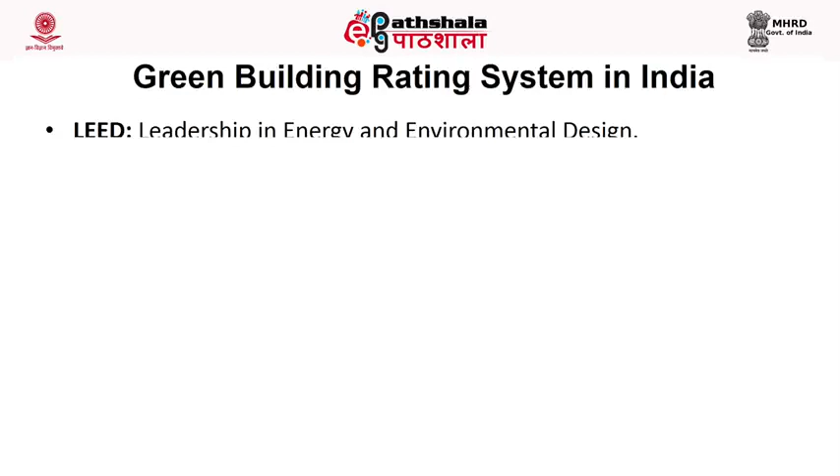Now let us discuss the green building rating systems in India. One system for rating of the building is LEED, that is Leadership in Energy and Environmental Design. Rating in this system is given as silver, gold or platinum, based on the credit that can be achieved or earned based on the following 7 parameters:

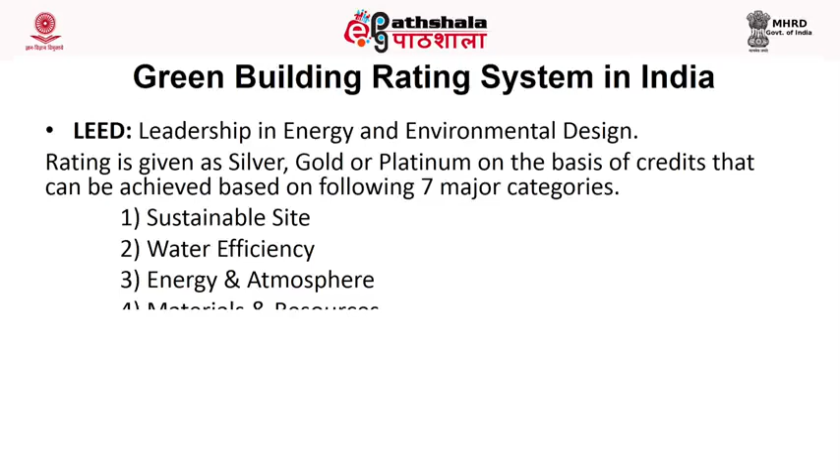sustainable site, water efficiency, energy and atmosphere, material and resources, indoor environment quality, innovation and design process, and regional priority.

The other rating system for buildings is Indian Green Building Council. The rating system or criteria upon which the building is rated is similar to that of LEED.

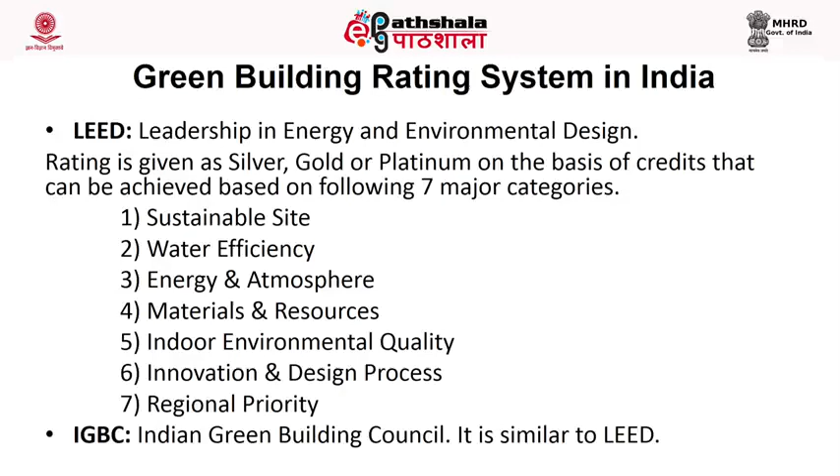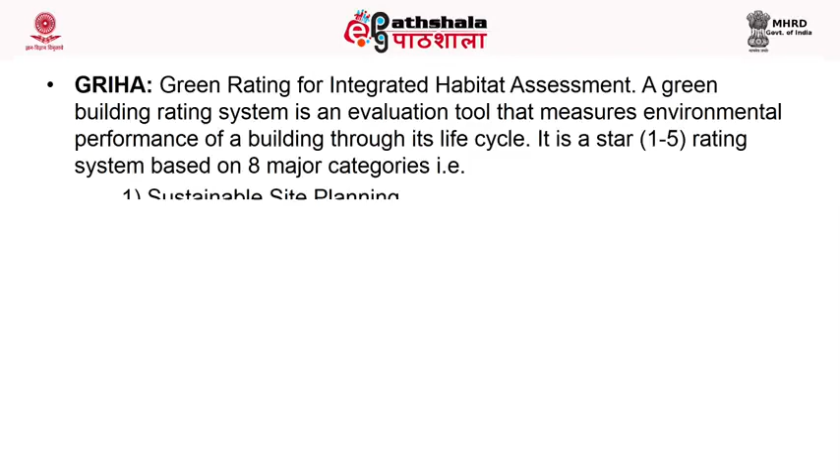Now the third system is GRIHA, which is more popular as compared to the previous two. GRIHA is Green Rating for Integrated Habitat Assessment, a green building evaluation tool that measures environmental performance of a building through its life cycle.

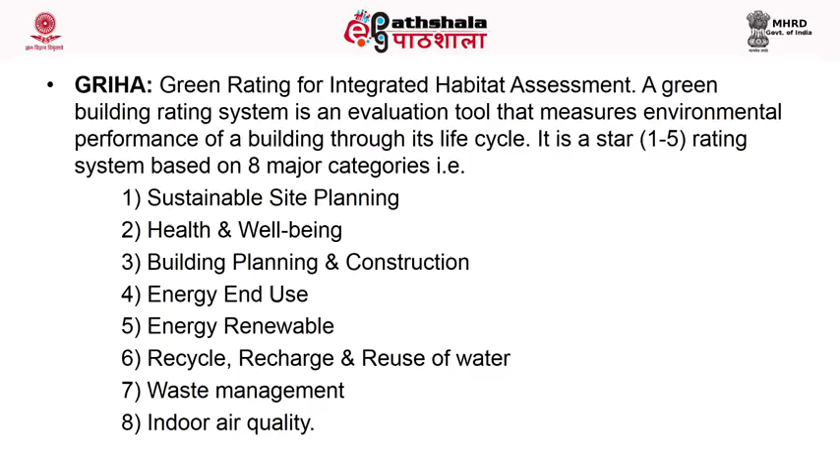The rating under GRIHA is awarded on a 1 to 5 rating system, and the different parameters on which points are earned decide the rating of the building. The 8 points are sustainable site planning, health and well-being, building planning and construction, energy use, renewable energy use, recycle, recharge and reuse of water, waste management, and indoor air quality.

GRIHA is India's national rating system, developed by the Energy and Resources Institute, and endorsed by the Ministry of New and Renewable Energy, Government of India. It is based on nationally accepted energy and environmental principles and seeks to strike a balance between established practices and emerging concepts, both at national and international level.

GRIHA attempts to minimize a building's resource consumption, waste generation, and overall ecological and environmental impact by comparing them to certain nationally acceptable limits or benchmarks.

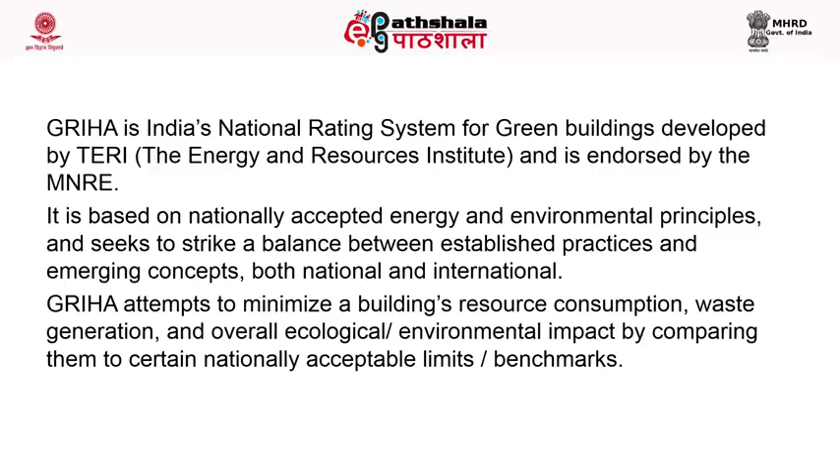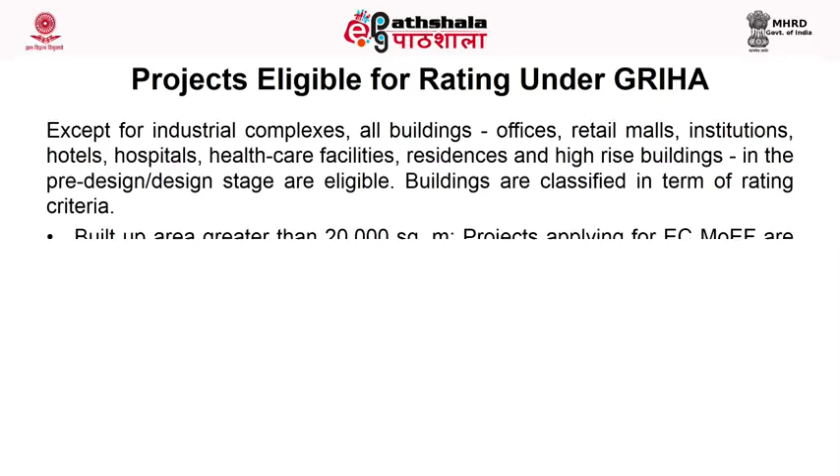Now, the different projects eligible for GRIHA rating are classified as follows: except industrial complexes, all buildings - offices, retail malls, institutions, hotels, hospitals, healthcare facilities, residences, and high-rise buildings - are eligible for rating under GRIHA.

The buildings rated under GRIHA are classified into categories. Category 1 is built-up area greater than 20,000 square meters. In this category, projects applying for environmental clearance to MOEF are eligible to apply. It is mandatory to register the project under GRIHA rating after the pre-certification has been awarded.

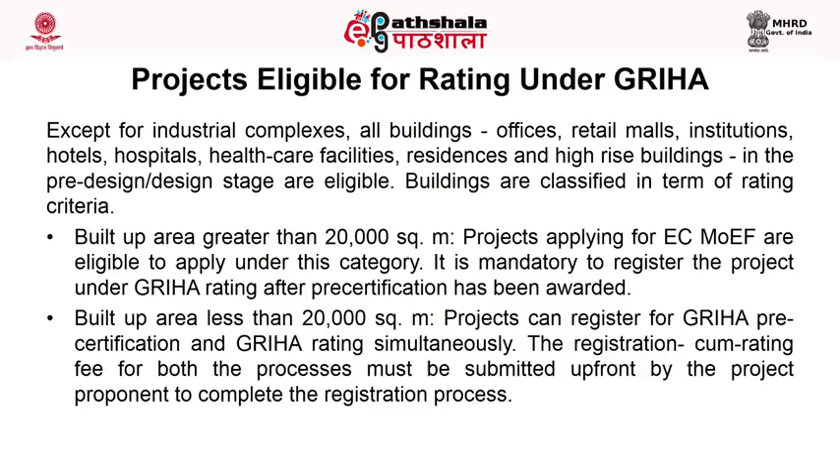The second category is where the built-up area of the building is less than 20,000 square meters. The project can register for GRIHA pre-certification and GRIHA rating simultaneously. The registration cum rating fee for both processes must be submitted upfront by the project proponent to complete the registration process.

Now let us discuss the registration process. Registration should be completed at the onset of the project cycle, as there are several important issues that need to be addressed at this stage only. On submitting the online expression of interest, the project team submits a proposed development plan with a recent date-stamped site photograph. Association for Development and Research of Sustainable Habitats, that is ADaRSH, shall then review the feasibility of registering the project for GRIHA pre-certification. Once approved by ADaRSH, the project can proceed with payment of registration cum rating fees and the pre-certification process.

The structure of the pre-registration fees: for buildings having area less than 5,000 square meters, that is rupees 3,14,000. If the area is more than 5,000 square meters, for every additional square meter, rupees 3 and 75 paisa, apart from the rupees 3,14,000. That is the registration fee.

In the post-documentation stage, all necessary proof through documents for the points targeted is submitted and then evaluated by third-party regional evaluators to determine the final rating to be awarded to the project.

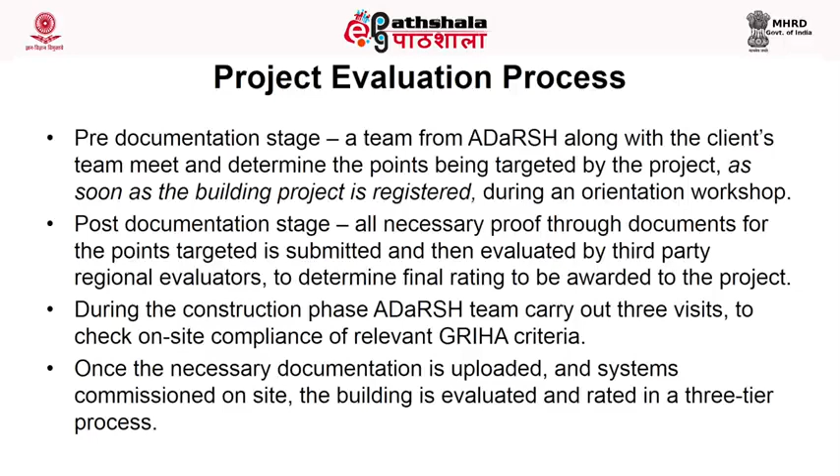During the construction phase, the ADaRSH team carries out 3 visits to check the on-site compliance of relevant GRIHA criteria. Once the necessary documentation is uploaded and the system commissioned on site, the building is evaluated and rated in a 3-tier process. The preliminary evaluation is done by experts from ADaRSH.

The project is rejected if mandatory criteria are not complied with at this stage only. The team then evaluates the optional criteria and estimates the total number of achievable points.

The next stage is that all compliance documents are vetted through the appraisal process as outlined by GRIHA. After this, the evaluation report is given to members of an evaluation committee comprising external experts.

The members independently review and award points.

It is believed that sustainability is always local, and thus also that the people of a specific region of our country know their local requirements best.

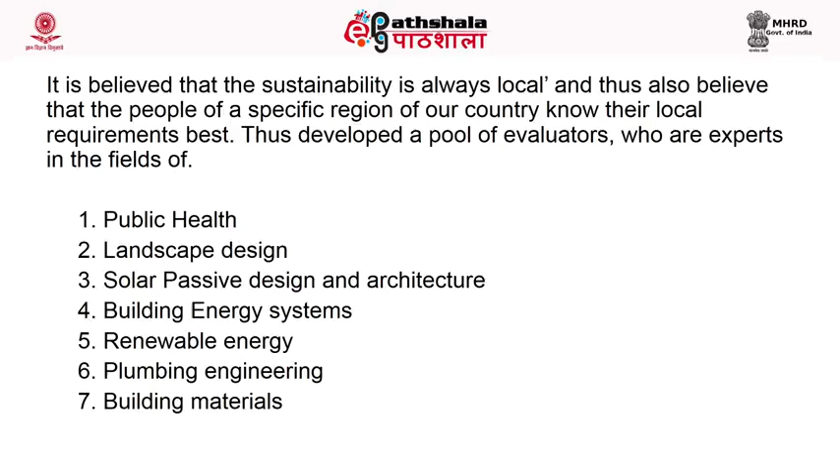That is why a pool of evaluators is developed by GRIHA, who are experts in different fields such as public health, landscape design, solar passive design and architecture, building energy systems, renewable energy systems, plumbing engineering, building materials, etc. This pool of experts from these areas conducts the evaluation for the building in their respective areas.

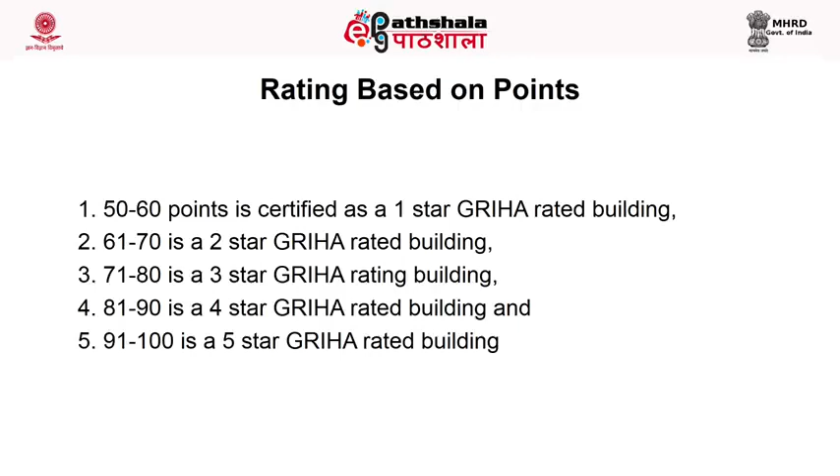The basis for rating based upon points scored by each building is as follows: below 50 points, there is no rating. From 50 to 60 points, the building is rated as 1 star GRIHA rated building. 61 to 70 points, it is 2 star. 71 to 80, it is 3 star. 81 to 90, it is 4 star. And 91 to 100, it is 5 star GRIHA rated building.

Now, the different criteria points: the first heading is site selection and site planning, worth 8 points. In all there are 34 points under 8 headings.

The main objective of this criteria point is to maximize the conservation and utilization of resources, that is land, water, natural habitat, fauna and energy conservation, and enhance system efficiency.

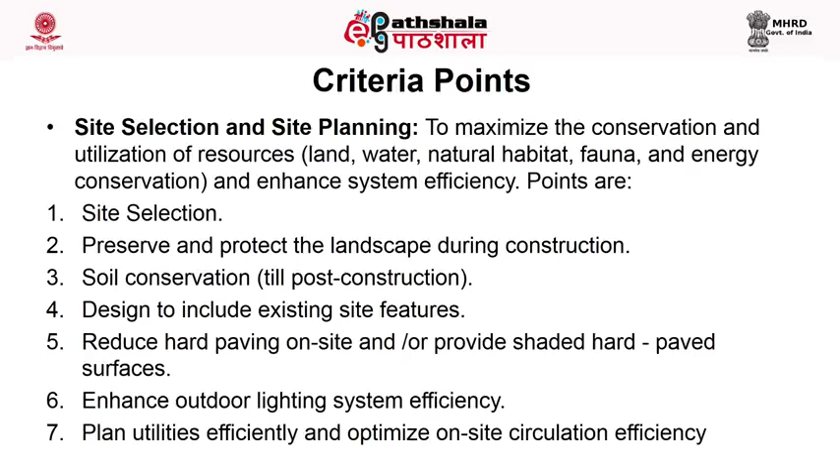The different points under this criteria are: site selection; preserve and protect the landscape during construction; soil conservation; design to include existing site features; reduce hard paving on site, or provide shaded hard paved surfaces; enhance outdoor lighting system efficiency; plan utilities efficiently; optimize on-site circulation efficiency; provide the minimum level of sanitation and safety facilities for construction workers; and reduce air pollution during construction. These are the 9 sub-points under site selection and site planning.

The next main heading is the building planning and construction stage. The objective of this criteria is to maximize resource conservation - water, energy and materials - and enhance efficiency of the system and operations.

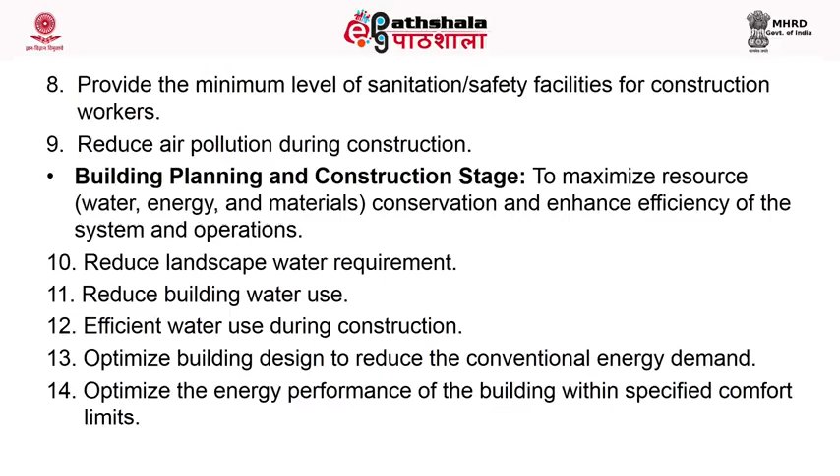Under this main heading, the different points are: reduce landscape water requirement, reduce building water use, efficient water use during construction, optimize building design to reduce conventional energy demand, and optimize the energy performance of the building without sacrificing the specified comfort limits.

Utilization of fly ash in the building structure. I may add here that fly ash is a product of the coal-based thermal power plant, and now the technology is available for the use of fly ash for construction or for manufacturing of bricks, and its use as one of the intermediates in the cement industry.

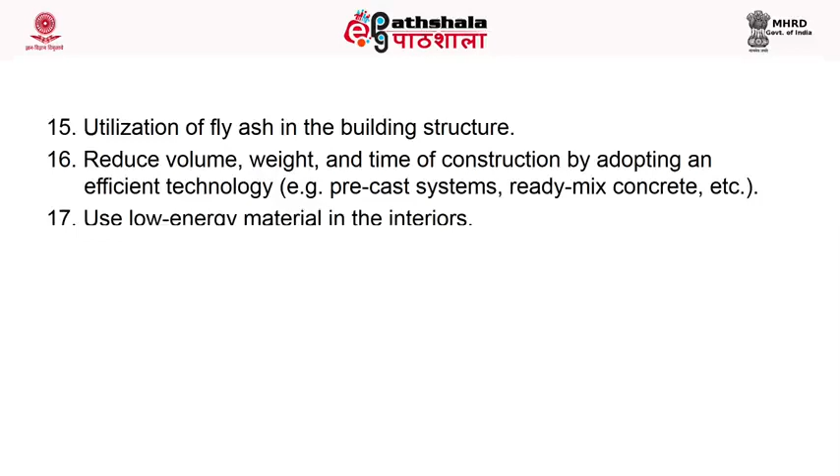The next point is to reduce volume, weight, and time of construction by adopting efficient technology - for example, the precast system, ready mix concrete, etc.

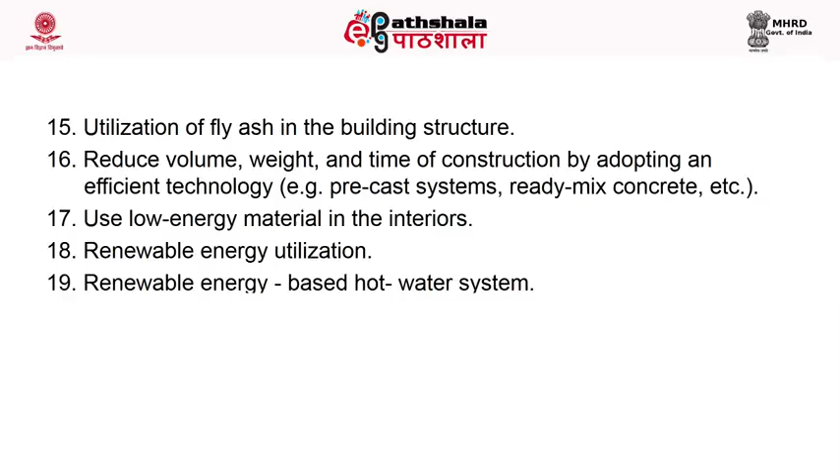Use of low energy material in the interior - it means that material used should be selected in such a way that the energy consumption in their manufacturing is minimum.

The next point is renewable energy utilization - that is, use of solar, wind, biomass based renewable energy systems depending upon the situation. Now, the renewable energy based hot water system: the solar water heater is one very important example, which can be utilized to supply hot water.

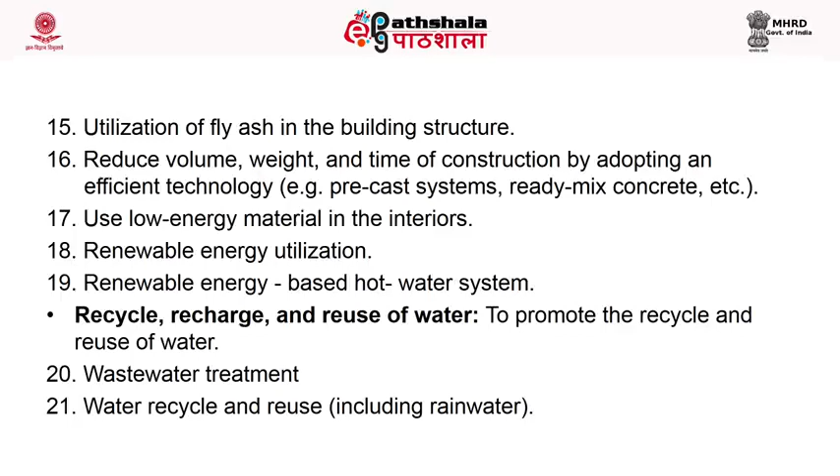The next main heading is recycle, recharge and reuse of water. The main objective of this criteria is to promote the recycle and reuse of water. Under this main criteria, the different points are wastewater treatment, and water recycle and reuse, including rainwater.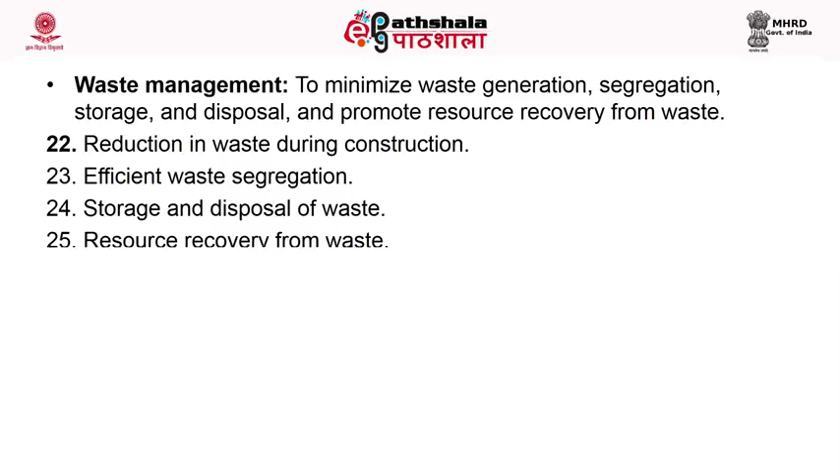The next main point is waste management, and the objective of this category is to minimize waste generation, segregation, storage, and disposal, and to promote resource recovery from waste. Under this criteria, the 4 points are: reduction in waste during construction, efficient waste segregation, storage and disposal of waste, and resource recovery from waste.

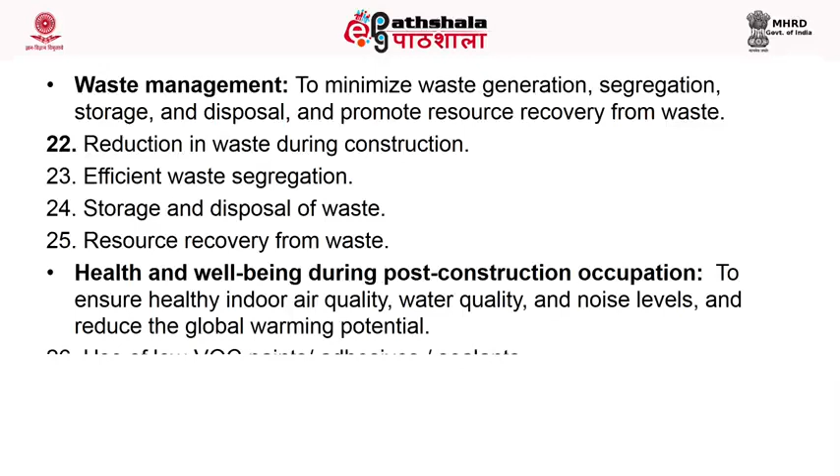The next main criteria is health and well-being during post-construction occupation. The objective of this criteria is to ensure healthy indoor air quality, water quality, and noise level, and to reduce the global warming potential.

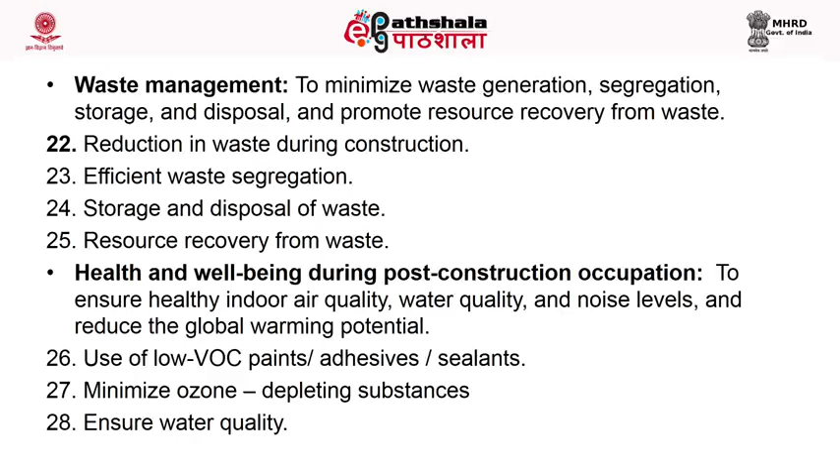The different points under this criteria are: use of low volatile organic compound paints, adhesives, and sealants; minimize ozone depleting substances; ensure water quality; acceptable outdoor and indoor noise levels; tobacco and smoke control; and provide the minimum level of accessibility for persons with disabilities.

The next main criteria is building operation and maintenance. The objective of this criteria is to validate and maintain green performance level, and adopt and propagate green practices and concepts.

The 2 points under this criteria are energy audit and validation, and building operation and maintenance. We have discussed in detail regarding the energy audit in one of the previous modules.

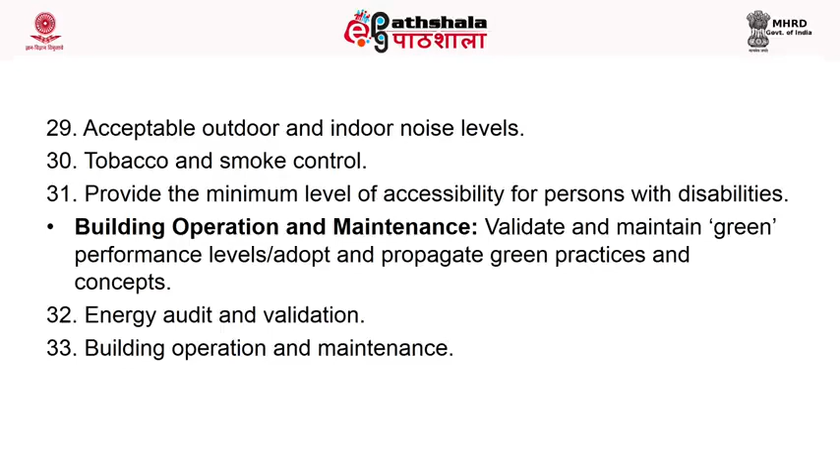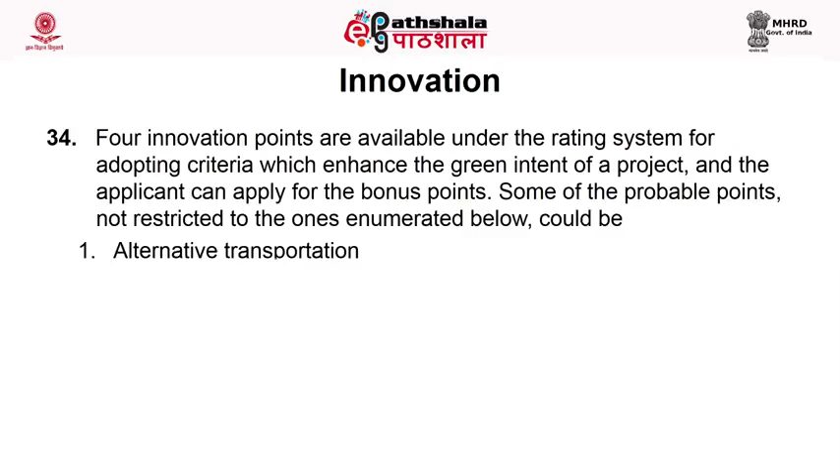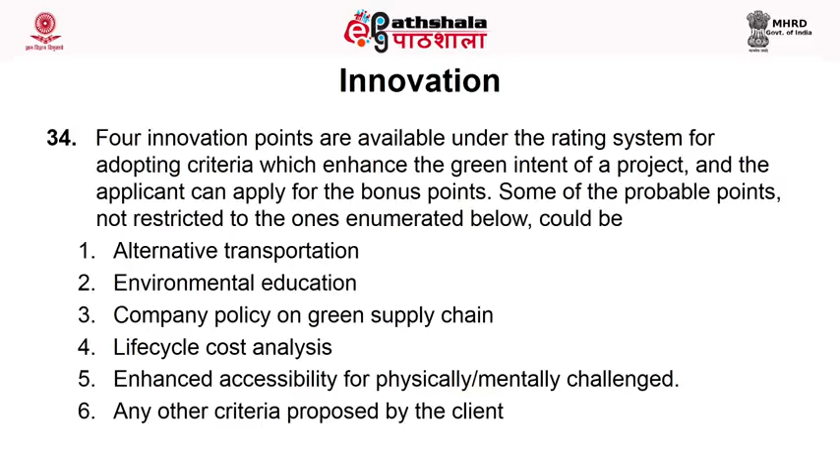The last main criteria is innovation. 4 innovation points are available under the rating system for adopting criteria which enhance the green intent of a project, and the applicant can apply for bonus points. Some of the probable points, not restricted to the ones enumerated, could be: alternative transportation, environmental education, company policy on green supply chain, life cycle cost analysis, enhanced accessibility for physically and mentally challenged, and any other criteria proposed by the client.

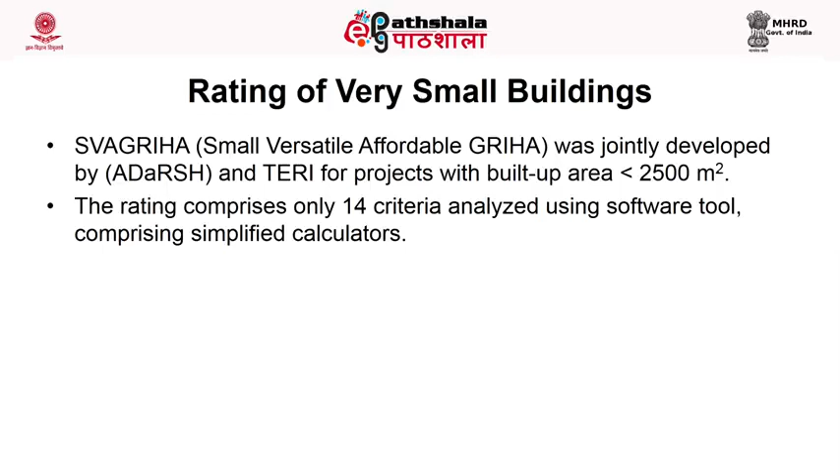Now this is all about the rating system through GRIHA for the green buildings. Let us also discuss very briefly the rating system for very small buildings. For rating of very small buildings, the small versatile affordable GRIHA, this was jointly developed by ADaRSH and The Energy and Resources Institute for projects with built-up area less than 2500 square meters.

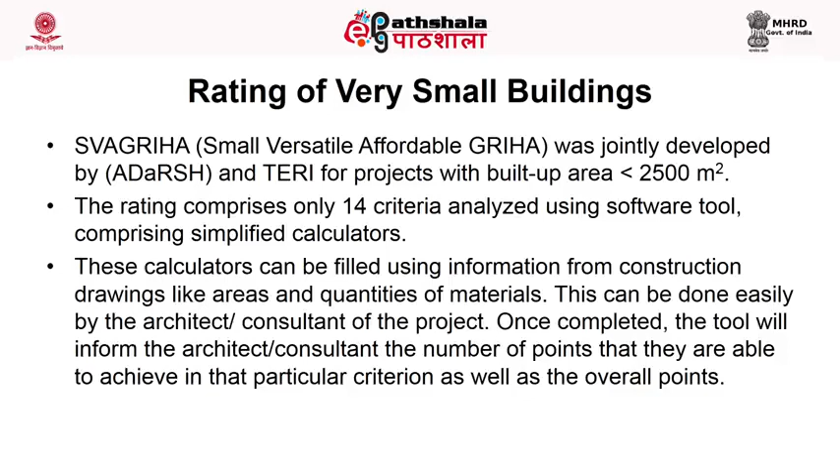The rating under this scheme comprises only 14 criteria, analyzed using software tools comprising simplified calculators. These calculators can be filled using information from construction drawings like area and quantities of material. This can be done easily by the architect or consultant of the project. Once completed, the tool will inform the architect or consultant the number of points they are able to achieve in that particular criteria, as well as the overall points.

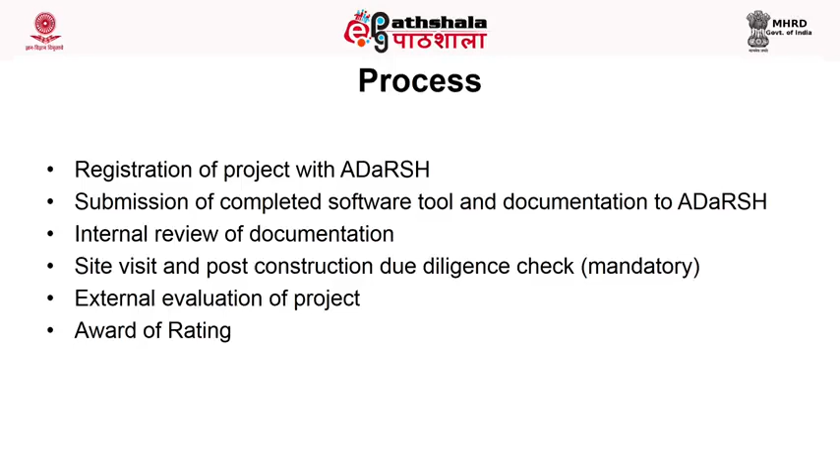The process for registration and evaluation of small buildings includes registration of the project with Adarsh, submission of completed software tool and documentation to Adarsh, internal review of documentation, site visit and post-construction due diligence check (it is mandatory), external evaluation of project, and the award of rating.

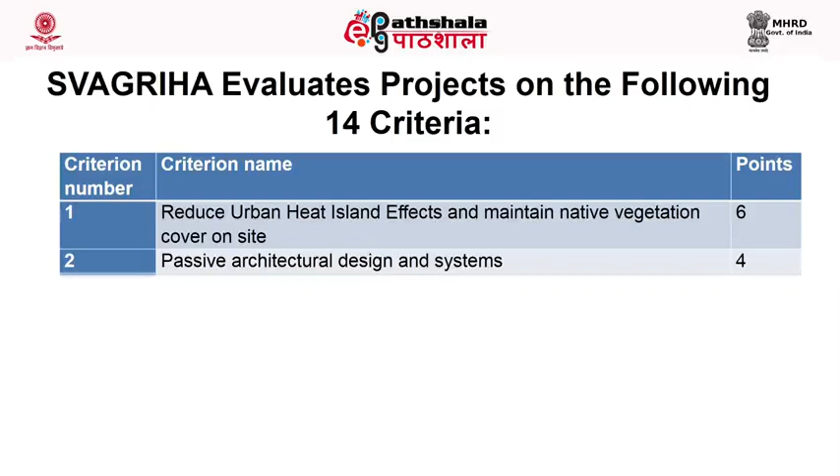Now the different 14 points required for evaluation of the building are: reduce urban heat island effect and maintain native vegetation cover on site, which contains 6 points. Then passive architectural design system, good fenestration design for reducing direct heat gain and glare while maximizing daylight penetration. The fourth point is efficient artificial lighting system.

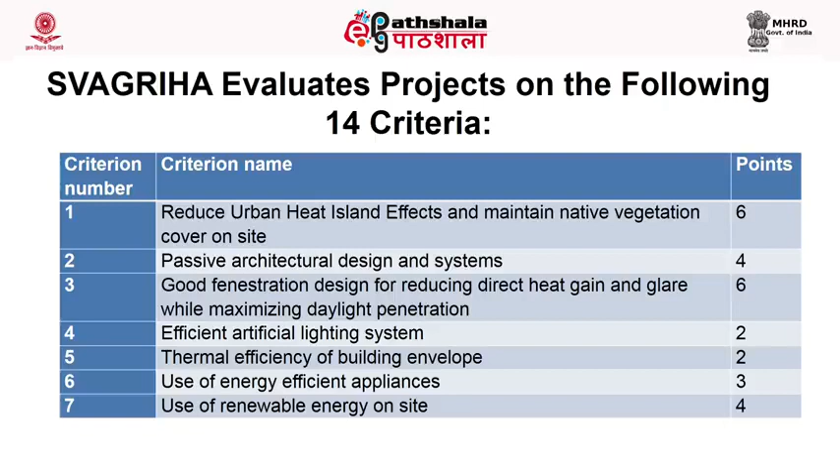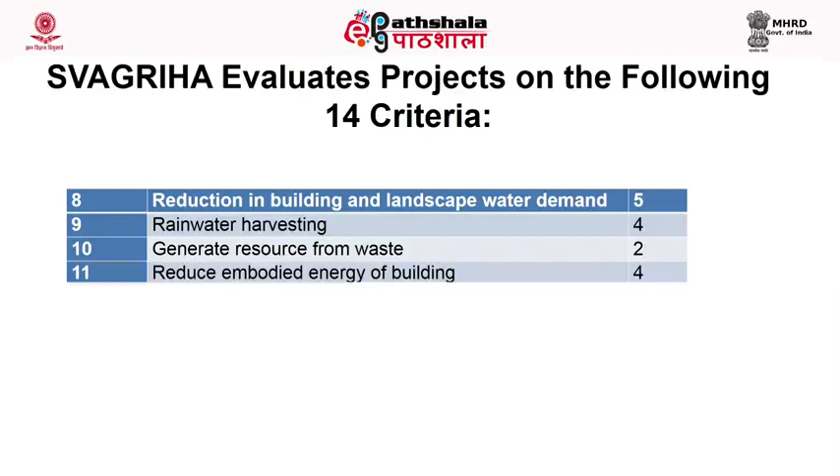Next is thermal efficiency of building envelope, use of energy efficient appliances, use of renewable energy on site, reduction in building and landscape water demand, rainwater harvesting, generate resources from waste, reduce embodied energy of building, use of low energy material in interiors, adoption of green lifestyle, and innovation.

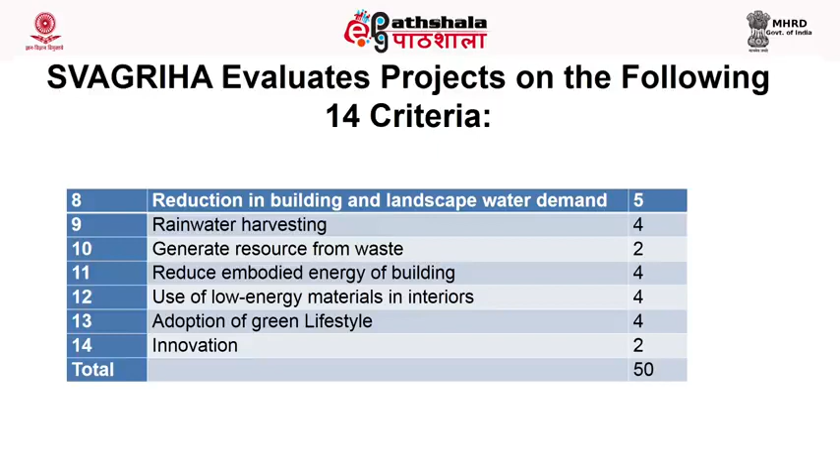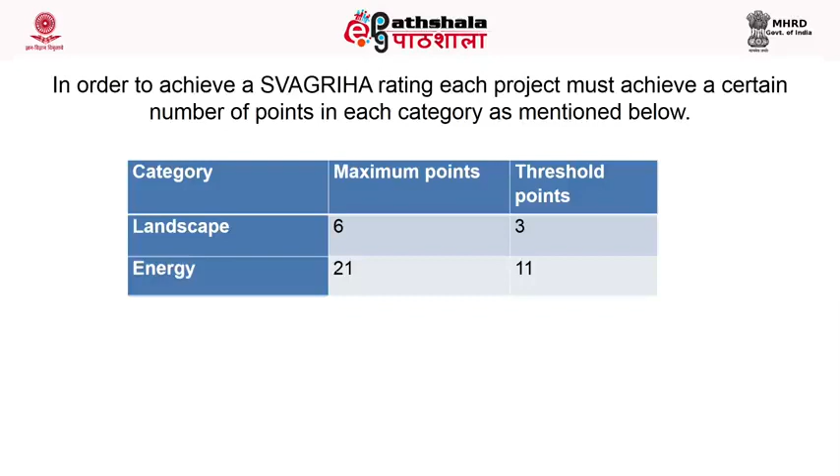So that way it has a total of 50 points, and during the evaluation, for each major category like landscape, energy, water, materials, and others, there are some threshold points, meaning that minimum those points should be earned to make the project eligible for its rating. The table gives the threshold point and maximum point in each of the 5 major categories, that is landscape.

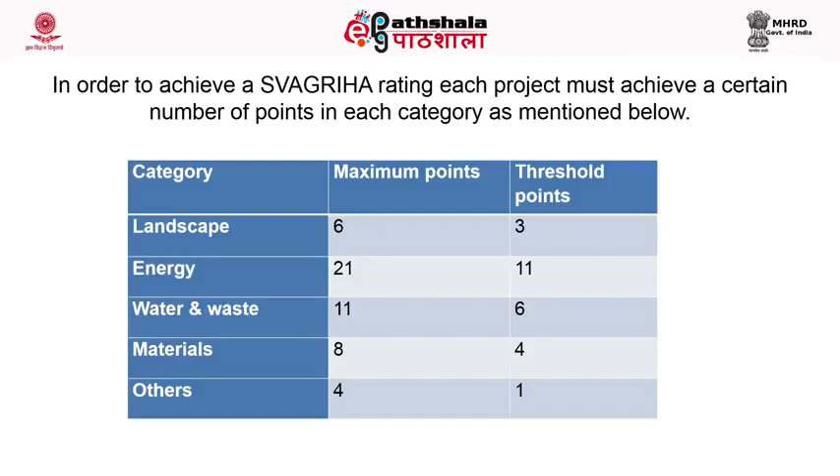The threshold point is 3, where the maximum points are 6. In energy, the total points are 21 and threshold point is 11. Water and waste, the total points are 11 and threshold value is 6. For materials, the total points are 8, whereas the threshold limit is 4. And others, 4 and 1.

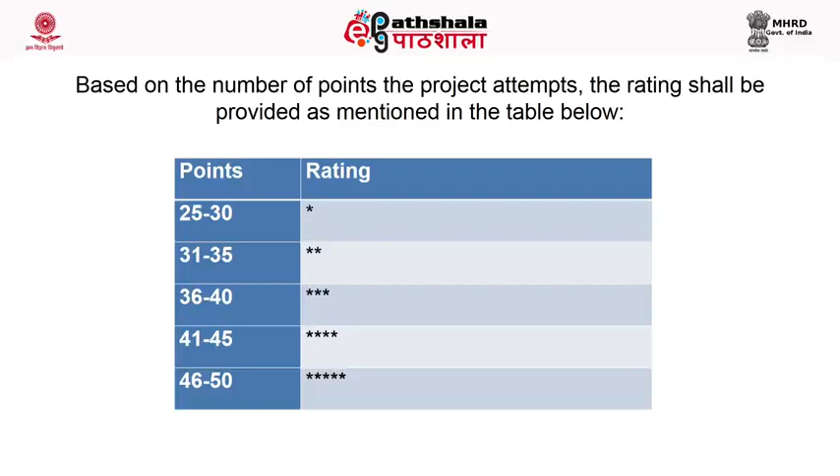Now, based on the number of points the project attains, the rating shall be provided from 1 to 5 star. The relation between the points and the rating is: 25 to 30 points earned is rating 1 star building. Points earned from 31 to 35 is 2 star, 36 to 40 is 3 star, 41 to 45 is 4 star, and 46 to 50 is 5 star.

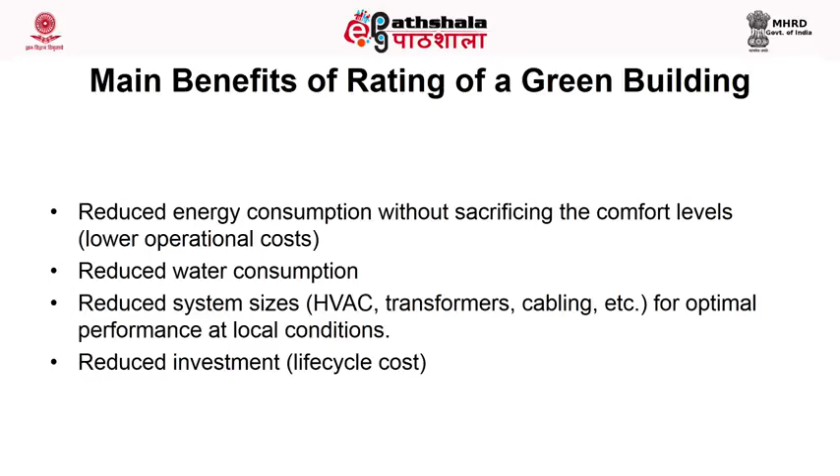Now the next question is what are the main benefits, why we should go for green building rating. The important points are: reduced energy consumption without sacrificing comfort level, reduced water consumption, reduced system size - transformer, cabling, etc. - for optimal performance at local conditions, reduced investment, reduced destruction of natural areas, habitat, biodiversity, reduced soil loss from erosion, etc. Reduced air and water pollution with direct health benefits, limited waste generation due to recycle and reuse, reduced pollution loads, increased user productivity, and enhanced image and marketability.

Now, apart from these, there are certain incentives given by the Government of India at the center level and also the state governments for green buildings, which we have discussed in our previous module. So I advise my students to go through the websites of GRIHA, Adarsh, LEED, IGBC, and the National Building Code, to have a detailed description of all the points we have discussed.

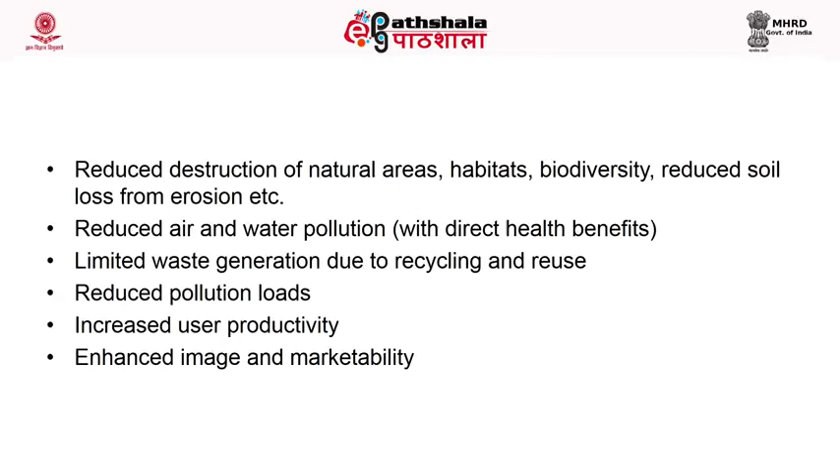In this module, we have discussed the eligibility of the buildings which can be rated through GRIHA, then 2 categories of buildings where the built-up area is more than 20,000 square meters and the building area is less than 20,000 square meters. We also discussed the procedure for registration of the building, the fee structure for the rating system.

And the complete procedure to be adopted for GRIHA rating of buildings. Now, buildings under GRIHA are rated from 1 to 5 star, and 5 star is the building based on different criteria earning more than 90 points. We also discussed the procedure for rating of very small buildings where the built-up area is less than 2500 square meters. Under that also, the building is rated from 1 to 5 star, and the 5 star building is one which is meeting all the mandatory criteria and earning points between 46 and 50.